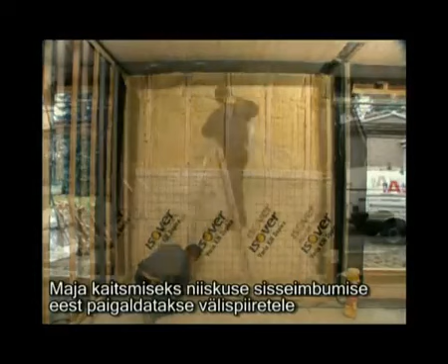What's the use of having the best insulation in the building envelope if it's not effectively protected from moisture? To protect the building against ingress of moisture, a so-called vapor retarder membrane is installed on the inside of the building. The membrane is stapled into place. Afterwards, the joints are sealed with tape in order to create an airtight system.

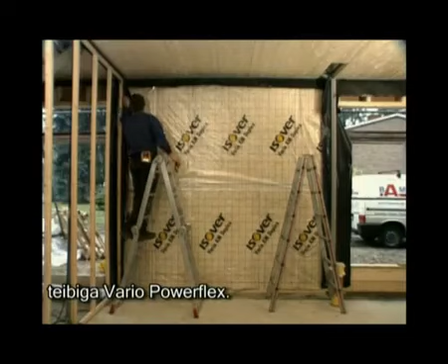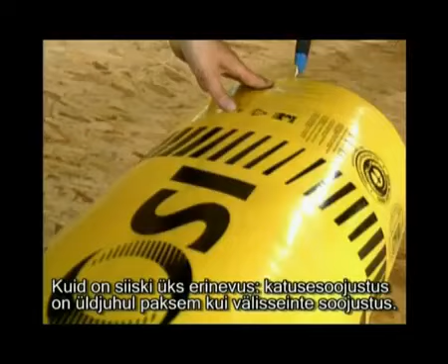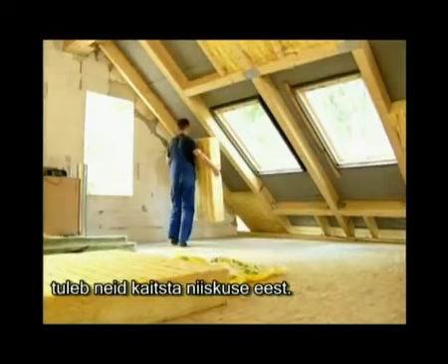The insulation of the roof is based on the same principle. There is one difference though. Thermal insulation of the roof is generally thicker than in the external walls. With good reason, since the amount of heat lost through the roof is higher than through the walls. If the insulation system and the construction is to function properly, it needs to be protected against moisture. Even little faults in workmanship may later result in high energy losses.

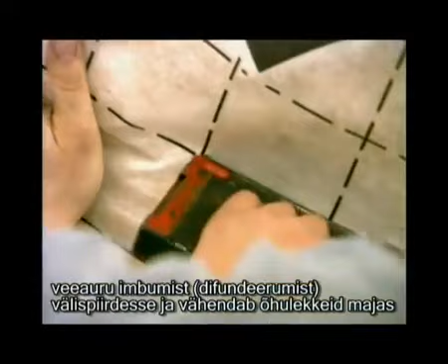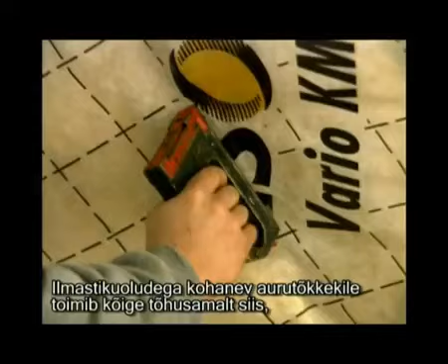It is therefore necessary to install a smart vapor retarder membrane, a variable climate membrane that prevents the intrusion of moisture into the building shell and minimizes air leaks through the connections in the building envelope. If the adaptive vapor control membrane is to develop its full effect, it must be installed professionally. First, the membrane is fixed with staples placed at intervals of 20 centimeters.

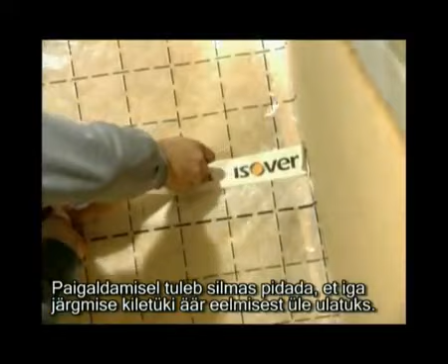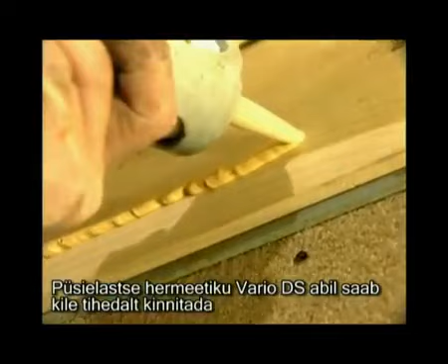When fixing the second membrane strip, it must overlap the first one. Important is the careful interconnection of the single membrane strips. They must be sealed airtight with adhesive tape. A permanently elastic sealant fixes the membrane to structural components, for example masonry, plaster or wood, to tightly seal the resulting joints.

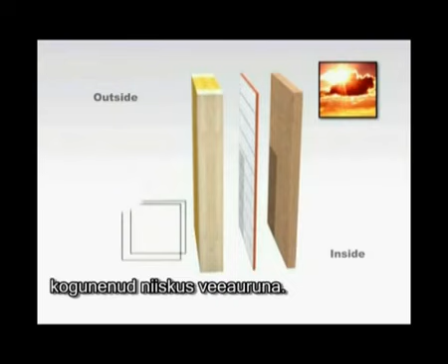The special feature of this smart vapor retarder membrane is its Vario effect. This protects the house and its inhabitants actively from moisture, draft and wood preservatives. When the temperature increases in summer, moisture trapped in the wooden components is released in the form of water vapor. Thanks to the Vario effect, the water vapor can escape inwards through the smart adaptive membrane, thus ensuring that the building structure can safely dry out.

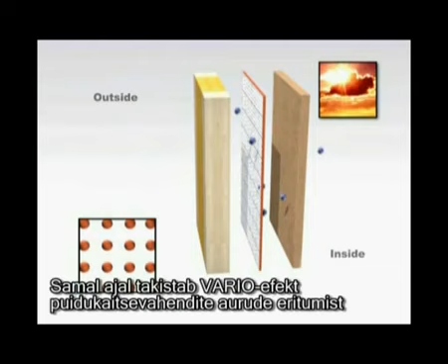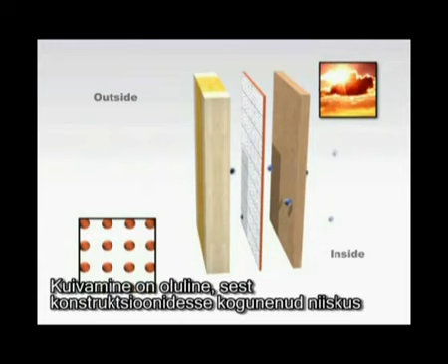At the same time, the Vario effect prevents the exudation of wood preservatives into the building interior. Conventional vapor control membranes do not have this capacity. The drying out effect is important since moisture in the roof can cause structural damage, and in extreme cases even result in wood rot, especially during summer.

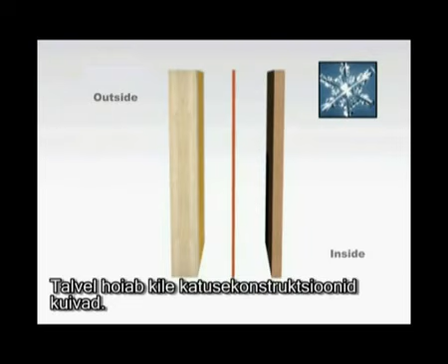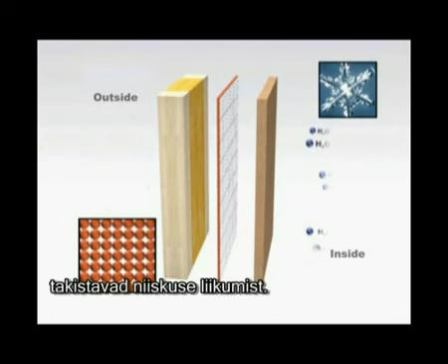In winter, however, the membrane keeps the roof structure dry. The membrane then slows down the migration of water vapor from the inside outwards. The smart adaptive vapor retarder membrane closes its pores and thus prevents the ingress of moisture. As a result, the roof structure remains dry, reliably protected by the Vario effect.

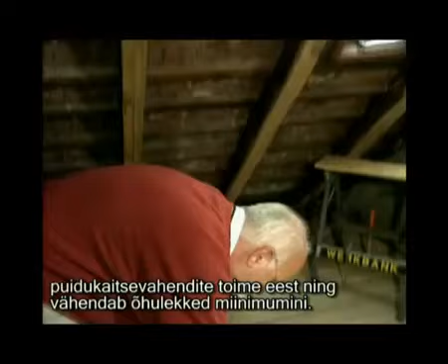On top of that, the house enjoys a smart air tightness system that protects from draft and wood preservatives and guarantees minimized air leaks through the building envelope. A sustainable solution for a sustainable house. In old buildings, you sometimes don't know which wood preservatives were used in the construction. Here, the membrane's variable vapor permeability prevents the penetration of toxic gases.

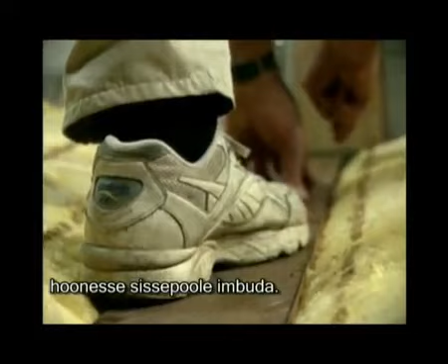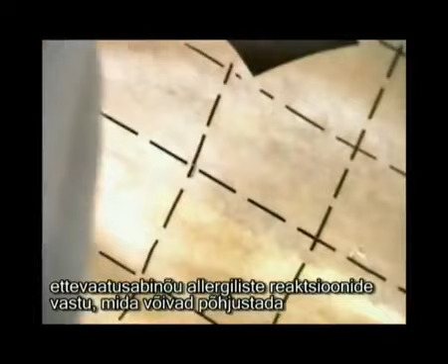Due to its easy application, the insulation system is also attractive for do-it-yourselfers who would like to convert their attic in order to achieve better comfort and lower energy bills. By installing an adaptive climate membrane, they take precautions against allergic reactions that may be caused by toxic emanations. At the same time, they provide thermal insulation in compliance with the latest standards.

An insulation system, like the one shown in this video, always consists of perfectly matched components. Building owners and do-it-yourselfers should therefore make sure that all materials come from a single supply source. When installing sufficiently thick insulation and the smart adaptive membrane Vario from Isover, comfortable living can be guaranteed.